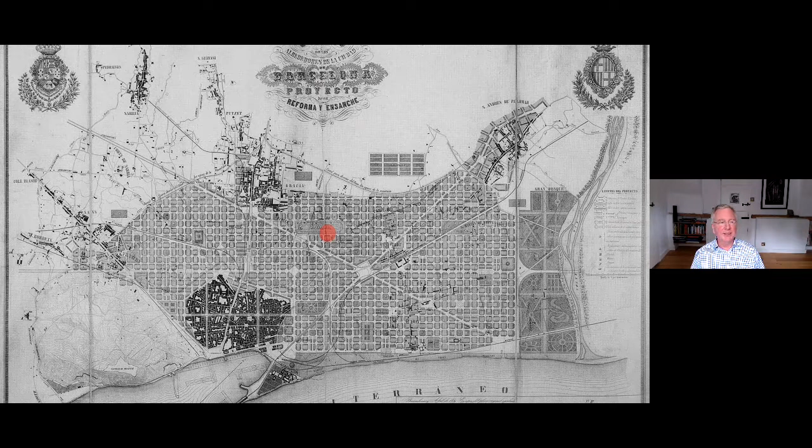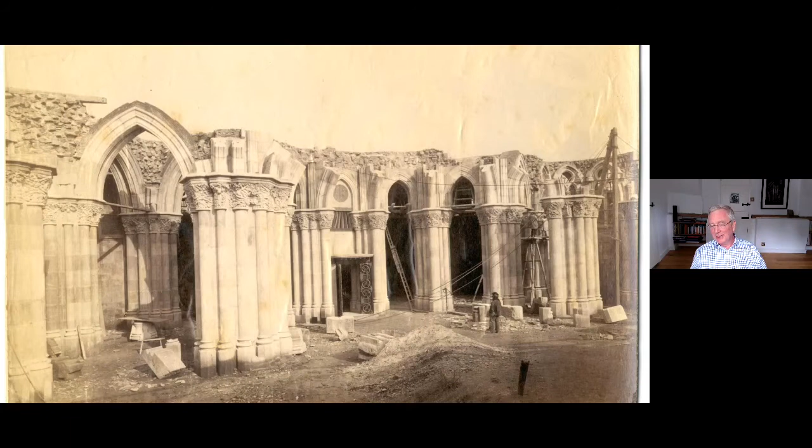That church was well under construction when we get to 1882, when Villar fell out with his client. Not an unheard of thing for architects to have disagreements with their clients, but in this case the disagreement was taken so far that Villar resigned from the project and refused to continue. At this stage, the crypt that you can see in front of you, the basement, was already more or less constructed.

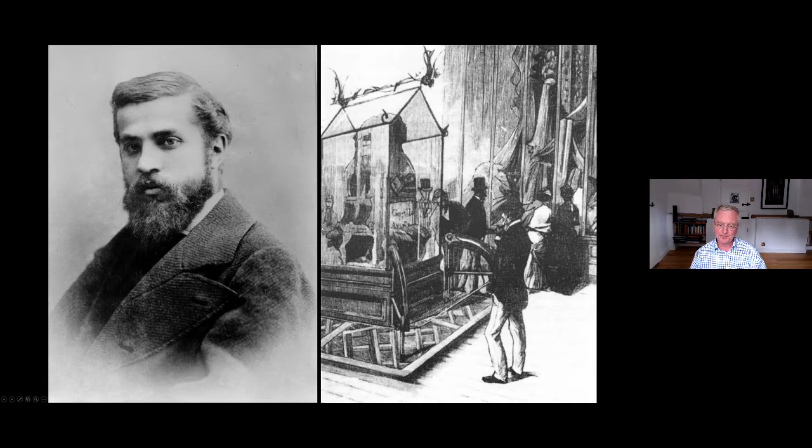What you'll notice from all of these is that at the time of Gaudi's appointment, he was sort of related to the arts and crafts movement of the UK. He was into craftsmanship, organic shapes and forms, and decorative arts, not strictly architectural, although that came later.

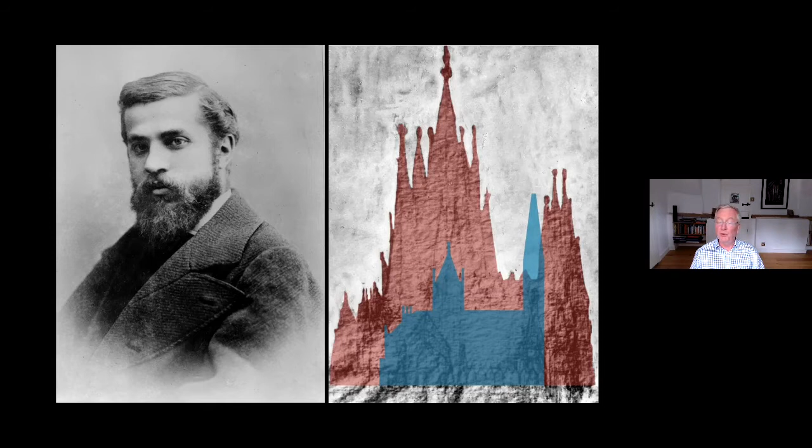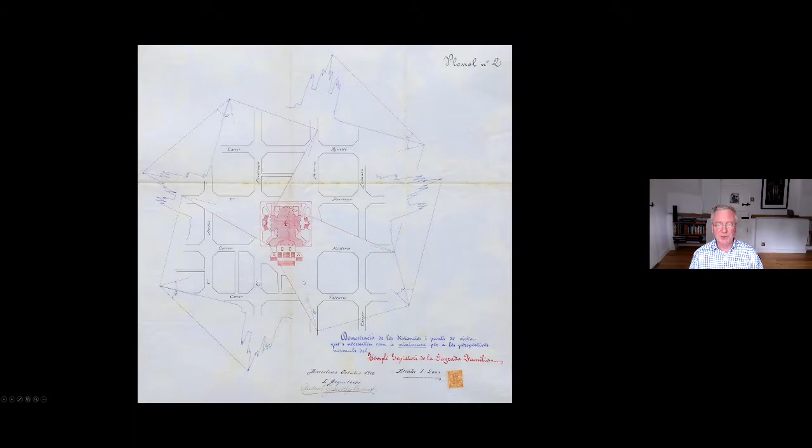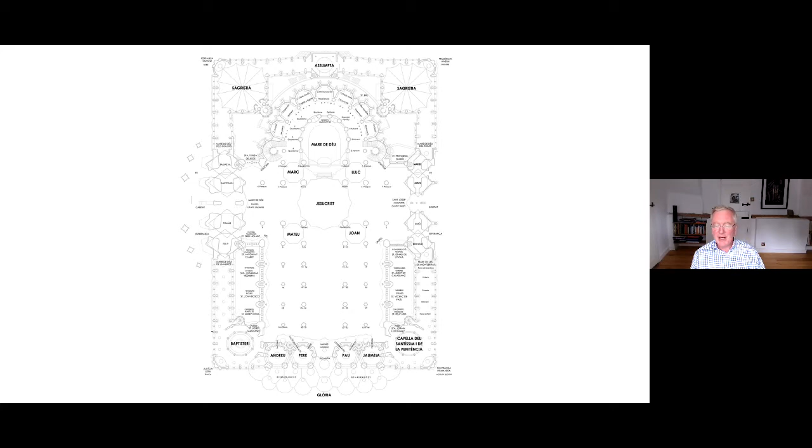But for this project, there's also theology. Every part of the church has theological meaning. This is an early drawing showing the meaning of all the different components. So it's no good me saying we don't need 7 columns in this area, we can make do with 4, if I've forgotten that there are 7 deadly sins and 7 virtuous graces. So we will have 7 columns whether we need it or not. It's another facet of design which I was unfamiliar with, but have now become quite used to.

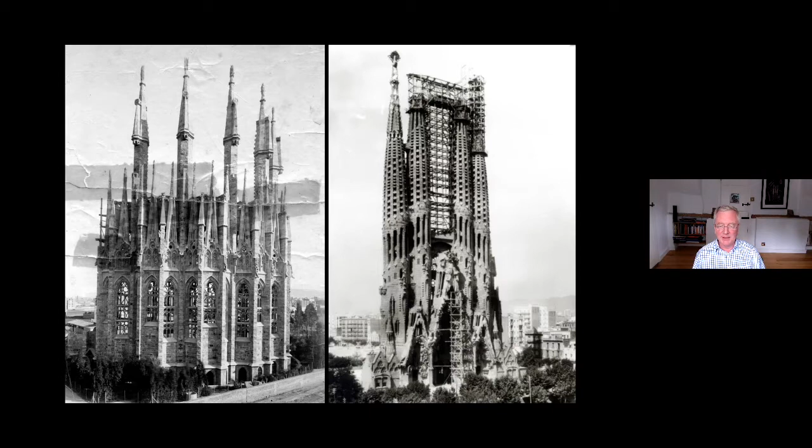Gaudi, after his appointment, spent the first 20 or so years working on multiple projects, but the last 20 years he devoted entirely to Sagrada. This is the state of construction when he died in 1926. You can see on the left he completed the apse around the main north end of the church, and he completed the east entrance, the side door, the nativity facade that you can see on the right.

The nativity facade is in its own right an absolutely incredible work of art. Its theme is life - it's about life coming out of the primordial soup in the background, as well as the classical nativity story in classical sculptures in the foreground.

It's got some Gaudi twists, some humour. Under the left-hand column of the main door is a turtle, because that way lies the sea. But under the right-hand column is a tortoise, because that way lies the land. So every time I go to Sagrada, I can read more and more into what I see and see more details.

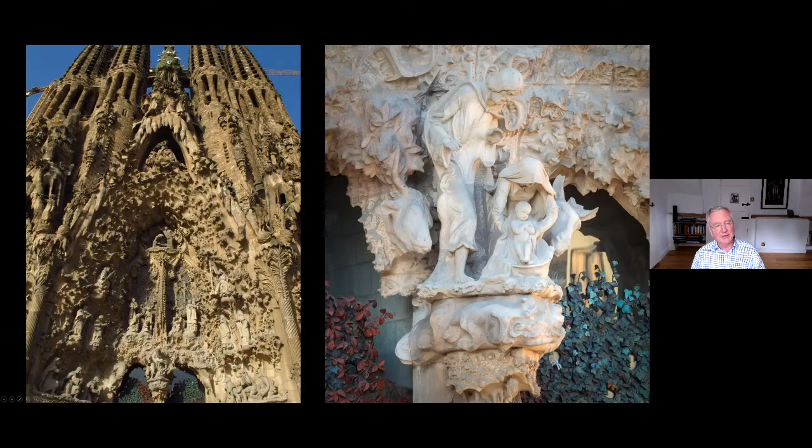You see here more details of the sculpture. On the left, amazing hanging stones done in pure masonry - there's no tension elements holding it up. On the right, the classical sculpture of the Nativity itself, sitting right in the middle of the main doors. And the main doors themselves, these amazing cast bronze doors, were only installed 3 years ago. So even something supposedly finished 100 years ago is still undergoing its finishing touches 100 years later.

Which brings me to another point about Sagrada: it's my observation that this project lifts people in their abilities. It somehow gets under their skin and causes them to do things they might otherwise not have done.

These doors are the work of a wonderful Japanese sculptor called Sotoo. Mr. Sotoo joined the team in 1978 as a stonemason with a hammer and a chisel, and he went on from there to do classical sculpture - some of the musicians you can see on the left are his work.

And he's now in charge of the whole decorative arts program at Sagrada and is personally responsible for these doors.

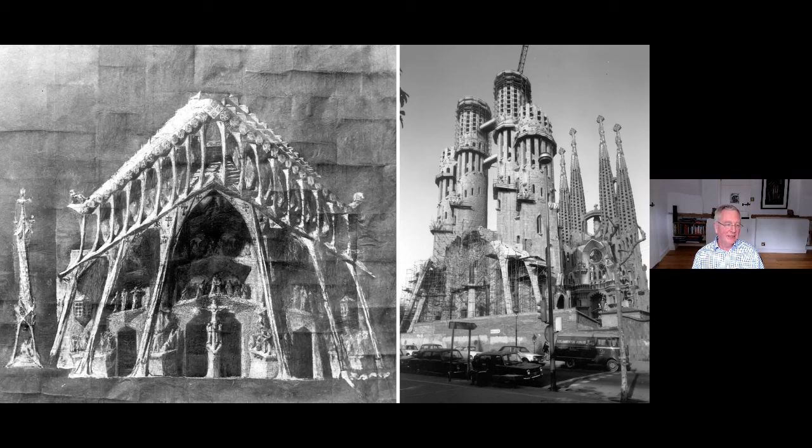On the left you see Gaudi's own drawing. So Gaudi didn't draw in a technical drawing sense - he drew in this more artistic sketch sense, and that's one of his drawings there on the left.

And here you see the completed Passion facade. The cross on top was only put on two years ago, so again it's reached fruition eventually. What you see here, of course, is a completely different artistic style to the one on the other side of the church. Life is carved in an organic fashion, and death is in this cubist, straight, harsh, angular fashion, with sculptures to suit by a guy called Josep Subirachs, again a local sculptor who was unknown on his appointment.

The arts intelligentsia, if you like, of Barcelona objected to his appointment, but he turned out these wonderful creations. You can see here the soldiers in the middle, or riding the horse on the left, that their helmets are actually the chimney pots from Casa Milà, as Subirachs provides a nod to the original designer of the church, Mr. Gaudi.

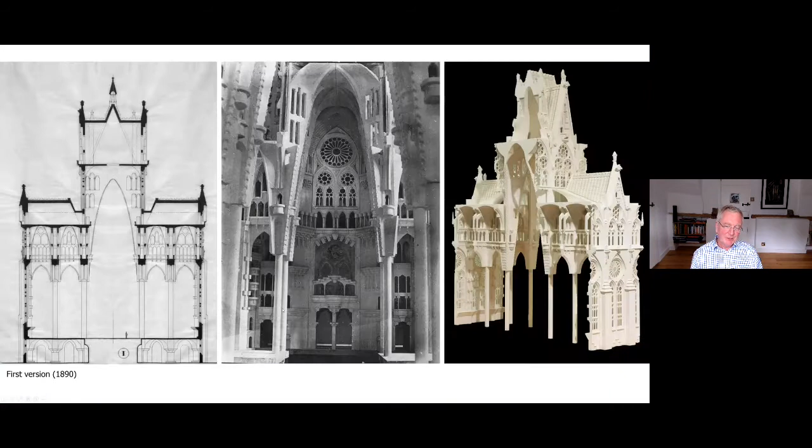So Gaudi started as an arts and crafts architect, a decorative architect, but he changed over his life. His first sketches for Sagrada, you can see here - the first version is again a more neo-Gothic, classically neo-Gothic design. It has modernist elements, stricter geometry than usual, and one particular structural form.

He didn't want to have either buttresses or flying buttresses outside the church - A, because he thought they shouldn't be necessary, and B, because they prevented light coming in through the windows, and he wanted the most airy and light-filled interior possible. You can see in the centre of the left-hand section this idea of a great big catenary arch, an arch which would carry load vertically downwards without creating thrust, sideways loads requiring buttresses on the outside.

And you can see here the back of the Nativity facade, because the Nativity facade was actually constructed in accordance with this first design, so that it is in this neo-Gothic, but slightly angular approach.

His third version is the one in front of you, where he is now trying harder to make the structure actually line up with the forces. You can see on the left the columns in the centre of the diagram aren't vertical - you can see how the load travels down the building, but he's still got where the columns branch. He's put in layers, platforms for the branching, which you can see in the middle and on the right. Actually none of the church is constructed in this design, because he then developed this technique for designing structure of masonry.

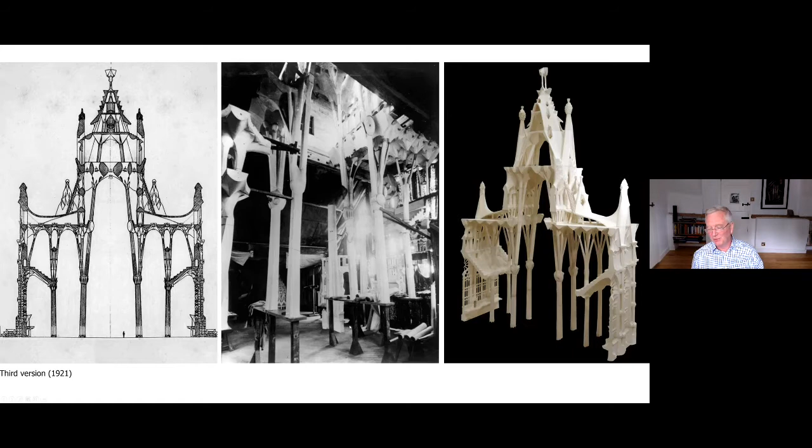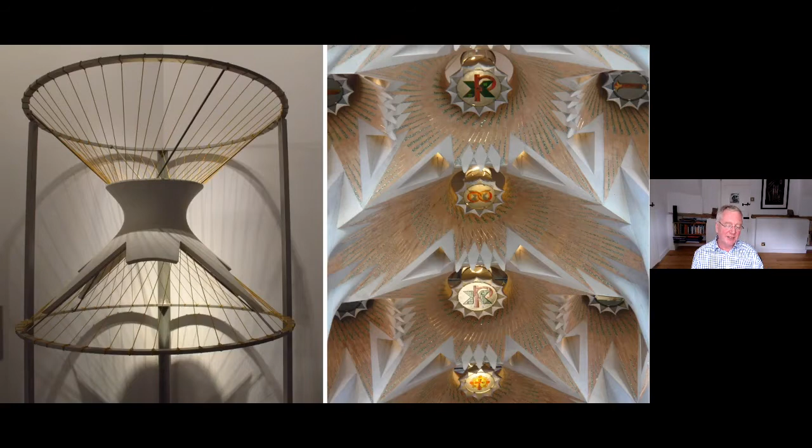Gaudi's second step, apart from making everything structurally perfect, was to become an absolute devotee of geometry. The piece of geometry he chose was what we'd now call a ruled surface—a surface that can be defined by straight lines, at least in one direction.

On the left, you see a model of a hyperboloid, a surface of revolution similar to those used in cooling towers at power stations, for example. His other primary surface was the hyperbolic paraboloid, which is a twisted square.

On the right, you can see the ceiling of the nave is entirely constructed out of hyperboloids. Even the decorative elements, those teeth hanging down between the hyperboloids, are actually the intersection of the straight lines between two adjacent hyperboloids. So the tiling follows the straight lines.

And it's a beautiful surface to use because the straight lines give it a way of order and a way of making it. We'll talk again about that later.

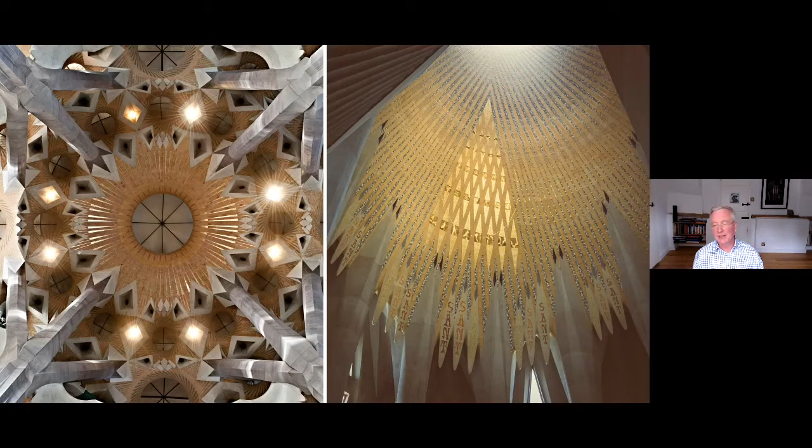Here, two more massive hyperboloids. The left-hand one is underneath the main tower, above the crossing in the middle of the church. The right is the one above the apse, which is also above the crypt. This yellow triangle you see glistening actually represents God, his or herself, being illuminated from above. So the big towers I'll talk about later are actually also lanterns, bringing natural light into the body of the church.

And at the end of the nave will be the main entrance, the Glory facade. So that's the first 130 years. And then we get to...

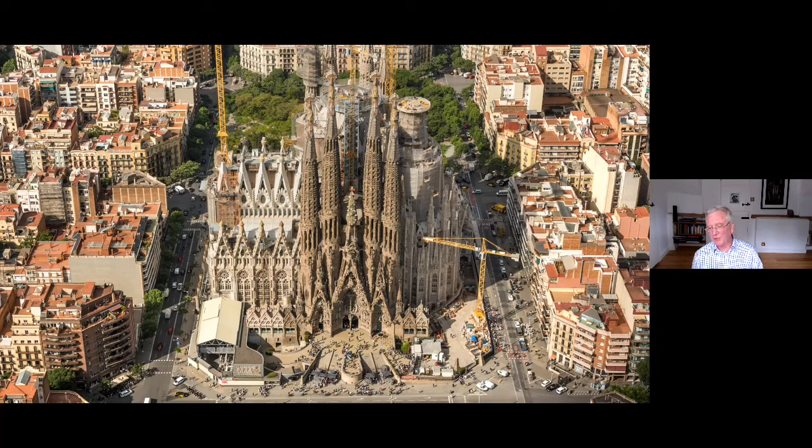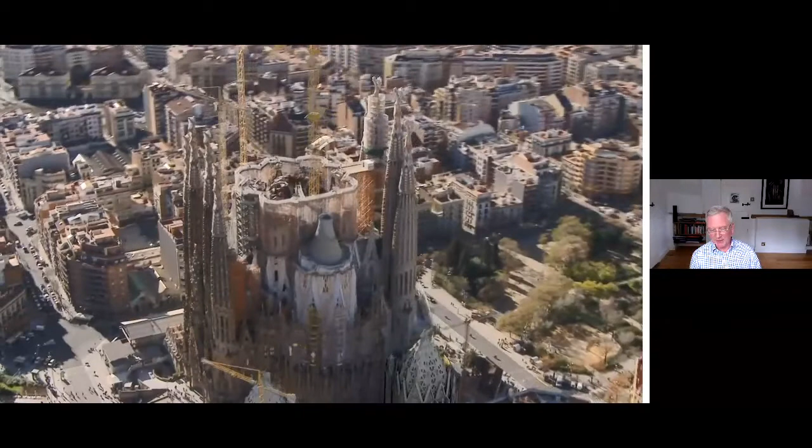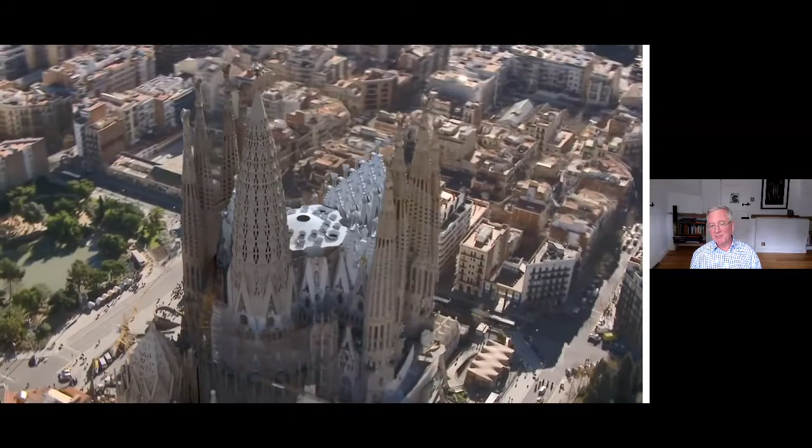And this is the amount of construction still left to be done. In the foreground you can see the two sacristies, one of which has now been completed, but wasn't completed 5 years ago. This is the Mary Tower, the first of the big towers on top, the one that sits above the apse and the crypt. There you can see the main roof, the structure, the room called the crossing underneath the main towers.

Here's the bottom of the evangelist towers, the 4 towers that surround the main towers. This is the pediment of the Passion facade, and I've already shown you that that's complete already. At the front entrance we have the 2 baptistries on either side, and then the main entrance itself with 4 more bell towers and this amazing canopy hanging out over the street. We have the 4 evangelist towers that surround the main Jesus Tower itself.

So when complete, the Jesus Tower, complete with an inhabitable or accessible cross at the top, will be 172.5 meters tall, making Sagrada Família the tallest building in Barcelona, the tallest church in the world, but still 1 meter shorter than Montjuic Hill, because Gaudi thought it wasn't polite to challenge God.

So on the left here, you can see the challenge writ large. We've built the dark brown bit, but we haven't yet built or even designed the pale brown piece, and we want to achieve what you can see on the right, the final construction of this wonderful church. And to do that, we have to speed up the rate of construction by a factor of 10.

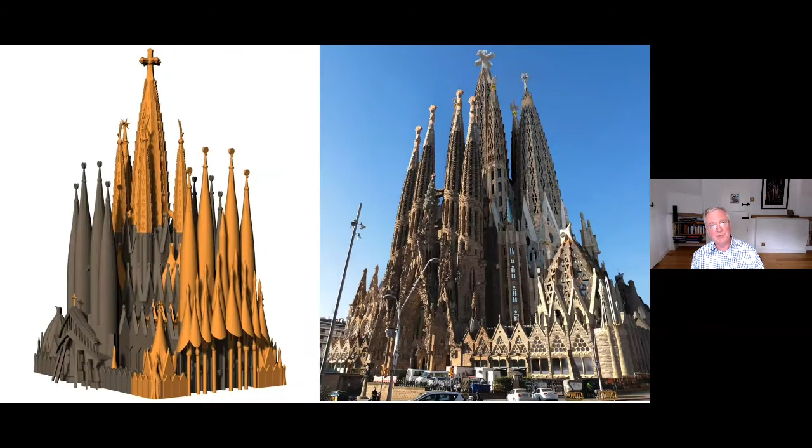The second part of the challenge is a legacy of Villar. The Mary Tower, the first of the big 6 towers, sits vertically above the crypt, and the crypt, when it was designed, had no idea that it had to support anything of this magnitude and weight, and therefore the foundations literally couldn't support it.

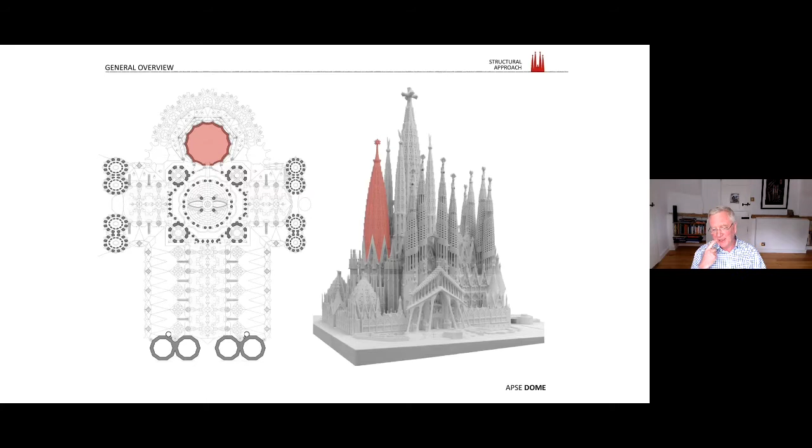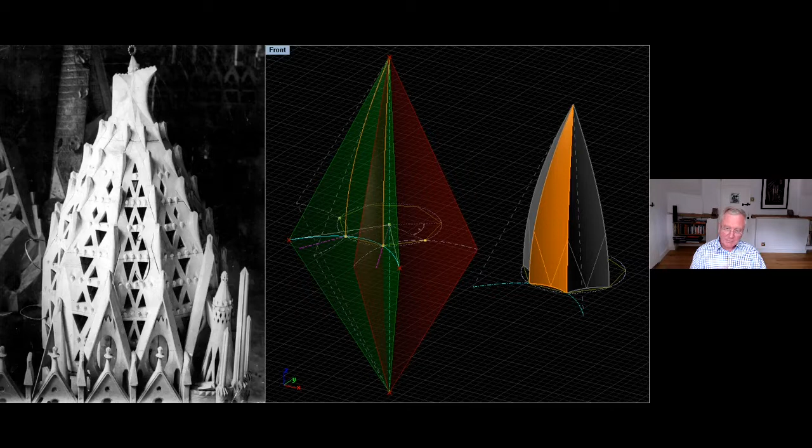We know the geometry of the Mary Tower because one of the models pieced back together again was this model on the left of the sacristy, and the Mary Tower's geometry is similarly made from the intersection of some vertically oriented hyperbolic paraboloids you see on the right here that rotate about the central axis, and where they intersect is what gives you this tower shape.

And now we can do all of that with Rhino and Grasshopper, and then extend it to 14 faces and the height of the Mary Tower, and this is what you get. This is the tower that was fully designed architecturally before the foundation came to approach us to talk about the structure.

But the problem was that you couldn't build this in masonry conventionally and support it on the crypt that was already completed, which you can just see in the bottom left of the section on the left hand side of the diagram.

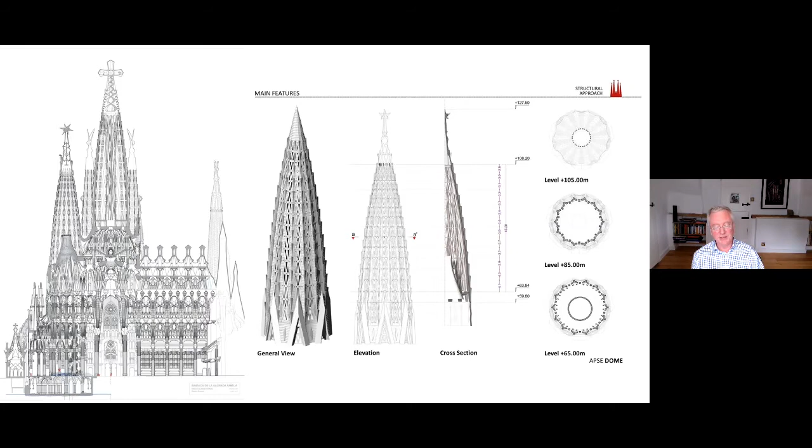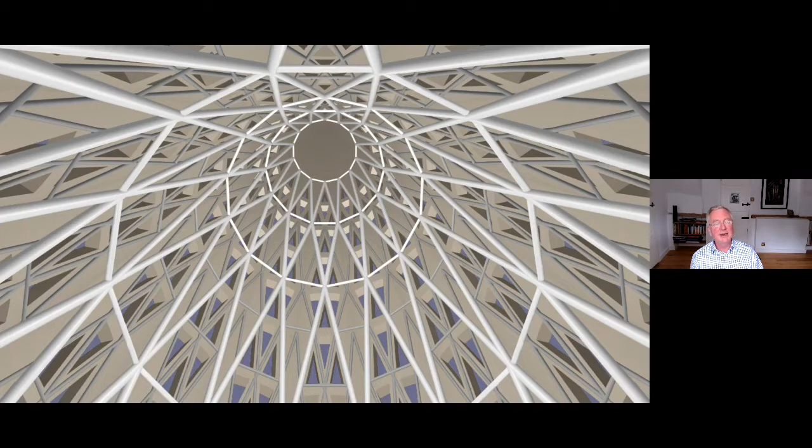The solution being proposed by the client at that time was to build a steel frame and then clad it with lightweight cladding panels that looked like stone. So from the outside, you could be fooled into thinking you were looking at a masonry tower, but inside it would be a bit like going around the back of a Hollywood Western set, and you'd see the scaffolding or pipework arrangement to hold it up.

The third part of the challenge, which we took very seriously, is how do you maintain the quality of this amazing project? This project's been already under construction for 130 years. There are a lot of people who think it shouldn't be completed at all because nobody can match Gaudi's talent. And there are others who feel it should remain as a building site because that's more interesting than a completed church. But of course, for the client, they want to complete a church, but to the highest possible quality.

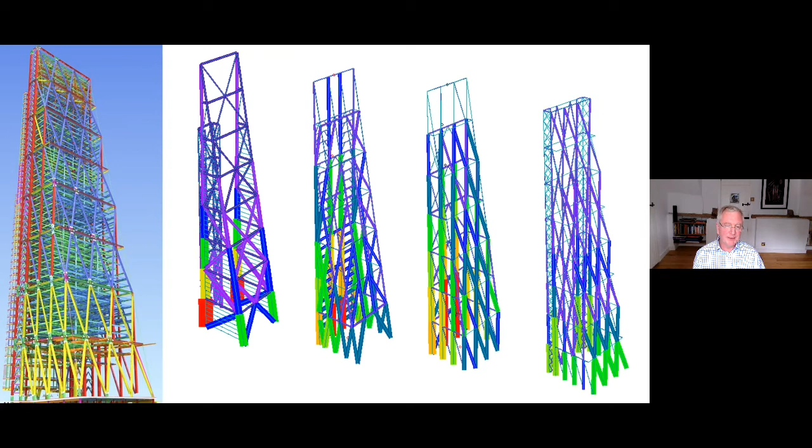So the first thing that we did is to say, well, what else do we know? What do we know that would help us meet this challenge? And the first thing we said is we knew quite a lot actually about steelwork. We just completed the Cheese Grater, or Leadenhall building, in London with Richard Rogers. We'd also completed the Orbit out at Olympic Park with Anish Kapoor. These are examples of complex steelwork.

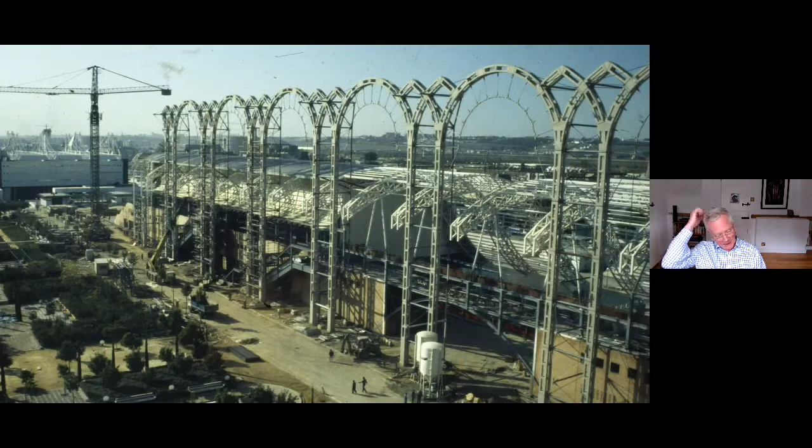But back in the 90s, we had made this slightly strange stone facade for a pavilion at the Seville Expo. This was a project I'd worked on with the late Peter Rice. And here we were trying to see how little stone you actually need. Stone in a medieval cathedral is using about 2% of its capacity. So what happens if we start using, let's say, 10% of its capacity and use steel to keep it stable? Because that's what the bulk of the stone in a cathedral is doing, is stabilizing it against thrusts and tensions.

We'd done this church with Renzo Piano in San Giovanni Rotondo, Padre Pio, where there's also load-bearing stone, in this case internally post-tensioned using steel strand. And in Sydney, where I've spent a lot of my life, I'd done this sculpture in sandstone blocks using stainless steel rods, also post-tensioned to hold the blocks together, which is how you can get this arching action. So we began to think, is there a way of actually building it in stone, but within the weight limit of the crypt?

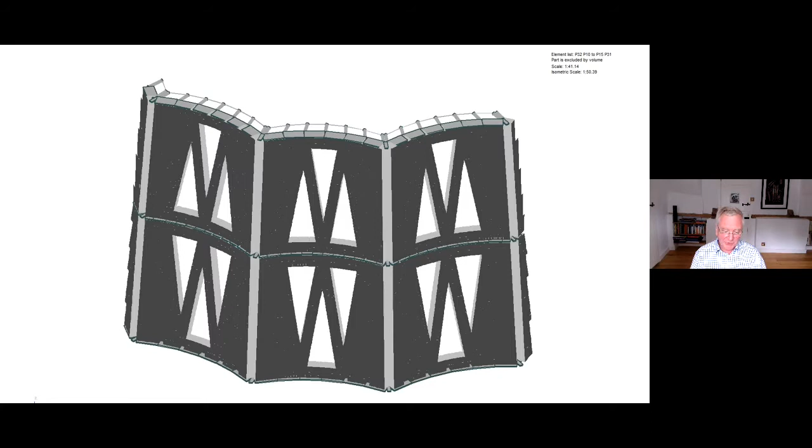My way of working is to use a computer to try and work this out. My head is not big enough to work out how structures in three-dimensional shapes and forms really work. So I built a finite element model in a structural analysis program. This is just 6 panels out of the whole model of 14 stories and 14 panels per story. And what I found out was that as a stone panel of only 300 millimeters thickness, we didn't have a structure.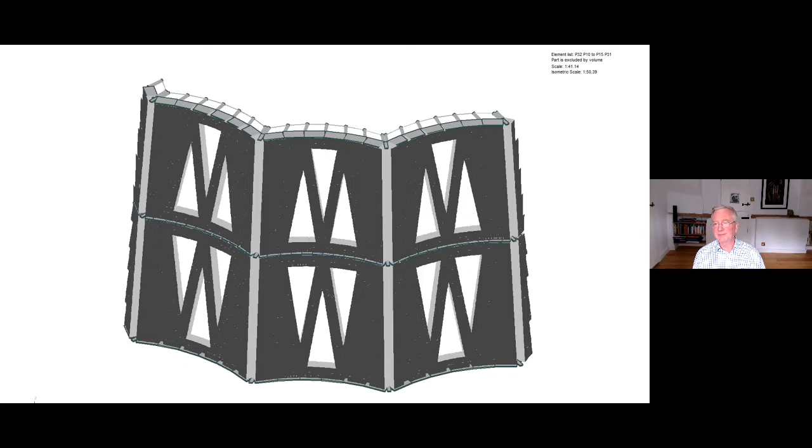You see, if the wind blows, this is what happens. The green is compression that the stone is quite happily taking, and the red, though, is tension that the stone is unable to take because it just pulls the joints apart. So this is the worst case panels under the worst load conditions, but you can see we just don't have enough weight to hold the tower down against the forces of nature trying to push it sideways.

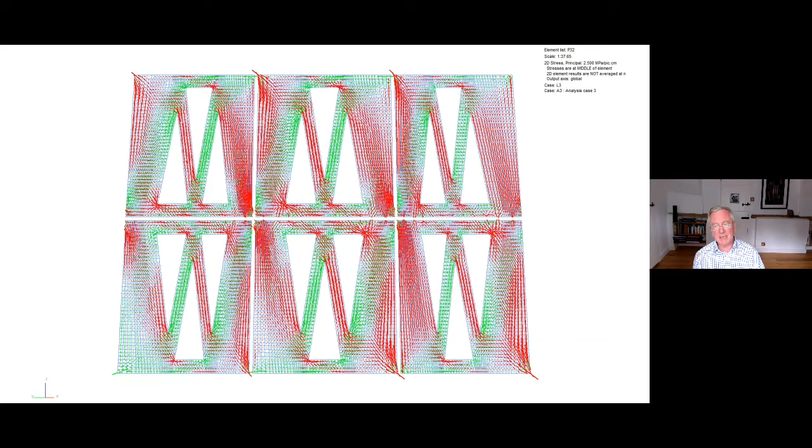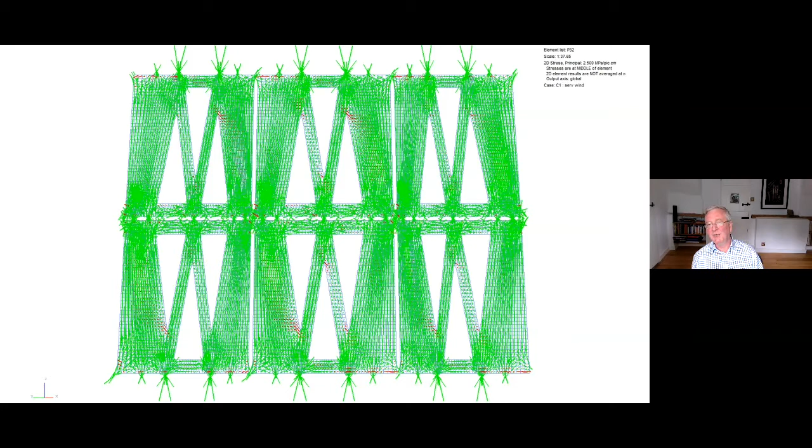But if we insert steel rods into these stone panels and post-tension them together, we pre-compress all the stone. So this is the compression field that you can generate with a few strategically placed rods. And now when the wind blows, you don't get that net tension because it doesn't really overcome the compression. There are a few little areas of tension, but they're not anything that will cause anything to break. Just locally we'll get joints opening up by a fraction of a millimeter and then closing again when the wind passes.

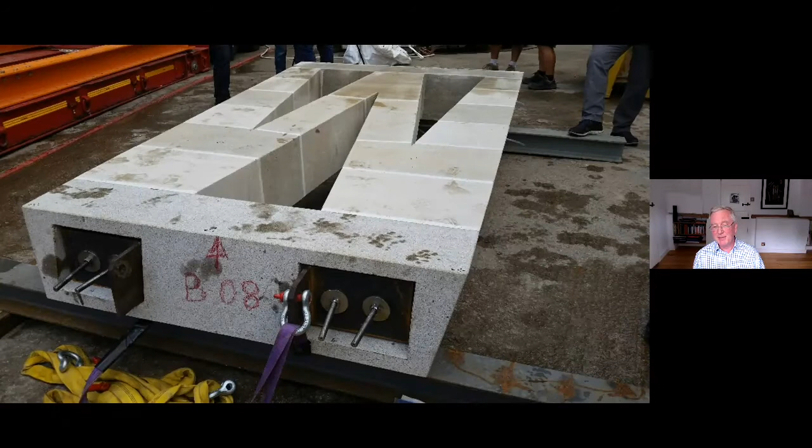So we took this to the client and the architect and said, what about it? This to us looks like a good strategy. And the amazing thing about Sagrada is they are also the builder. The builder was very keen to try out this new strategy. He wanted to know how easy was it to build? Did he like it? Did it save time? Was it easy to do? And so within a month, they had made a panel. They had cut a set of stones. You can see here the 20mm rods holding it all together.

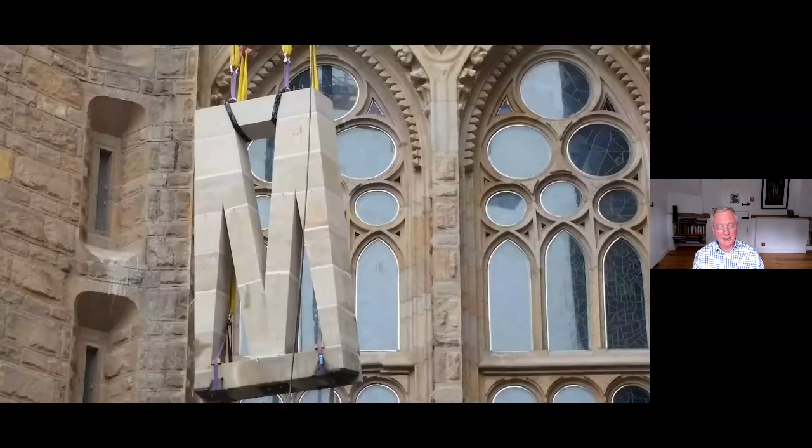You can see here it being lifted up to make sure it works in all different directions. And I love the fact that it's being lifted up vertically above the place where Gaudi himself did all his experiments. There's a bit of a hollow below you in the ground where he could do experiments out of sight of the passing public.

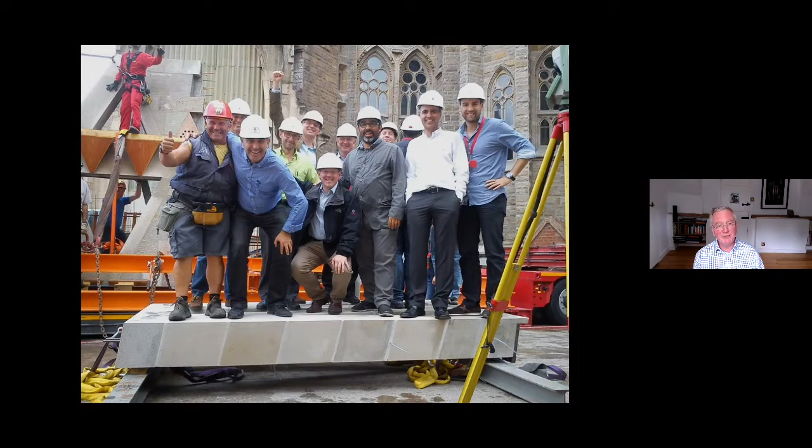Here you see the happy team. The builder is second from the left, and he's overjoyed at this experiment. He said it took him a day to put it together, and if you were doing anything similar to make a lightweight panel, he thought it might take a week.

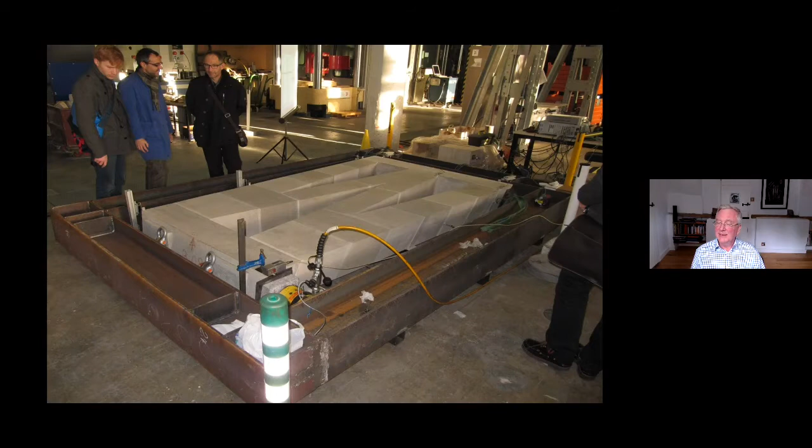An advantage for us as engineers is we can now test it. We know the computer says it works, but was the computer right? Is the computer modeling reality accurately enough? Have we made the right assumptions? What you see here is this big jack in the foreground pushing it sideways in the same way as the tower will when the wind blows. We test it out to make sure it behaves the way we're expecting it to behave, and I'm glad to say it did.

So a little intermission here, which is to say that projects are all about teamwork, and to get teamwork you have to have communication. I've never worked on a project with richer communication, and I think it might be because we don't speak Catalan, and our Catalan colleagues can speak English, but it's a bit of a struggle. So we communicate more by drawing than by talking.

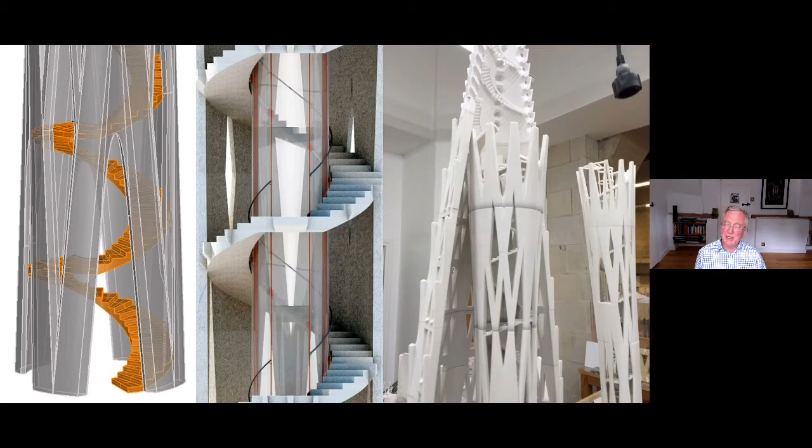You do lots of computer modeling. On the left you can see a sort of skeletal model, in the middle a rendered model, and on the right, from the same models, you can produce rapid prototype physical models at scale. Every time we go to Barcelona, which before the pandemic was once a month, there'll be a new set of models for whatever it was we were considering designing.

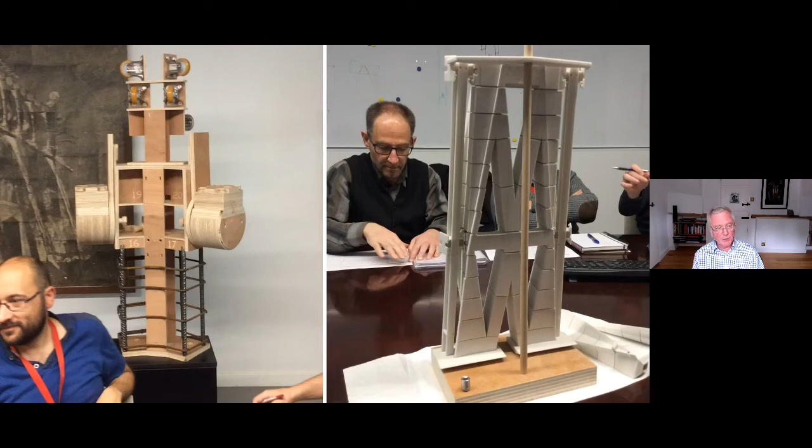And these are models of our own, showing construction stages of the towers, how you build it one by one. And here are two more models. The left-hand one is a model made by the builder, a one-to-one scale model of one of the connections, where he's finding out how easy is it to get the bolts in - is this a sensible way of making this connection?

And on the right is a model made by the architect, a little bit tongue-in-cheek I hope, because they've made a model where all the stone blocks are individual rapid prototype pieces, and then they've threaded a little rod through the middle, and you can see the spanner in the foreground for doing it up. I think they were just checking that this structural idea of post-tension panels actually worked, to get a feel for it.

And then lastly, this is a sketch by our project director, Steve McKechnie, showing he's developed a way of sketching which is idiosyncratic. It's purely Steve on an iPad, and it's a cartoon. But the wonderful thing on an iPad is you can zoom in and out, rub out things you don't like, correct them a bit. It's not perfect, but it absolutely conveys all the information he's trying to convey.

I think the point I'm trying to make here is some of my generation will say you have to be able to sketch with a felt pen to design. My view is that is not true. You have to be able to communicate to design, but it doesn't matter how you communicate, as long as you can communicate clearly and get your message across. And actually having a variety of communication methods is even better than a singular one.

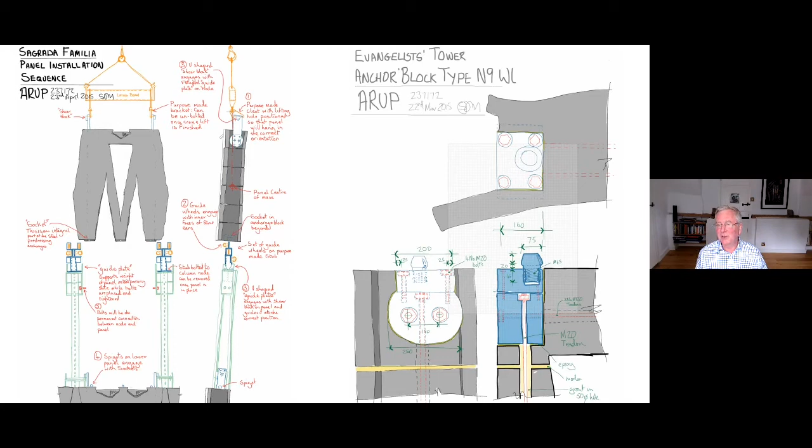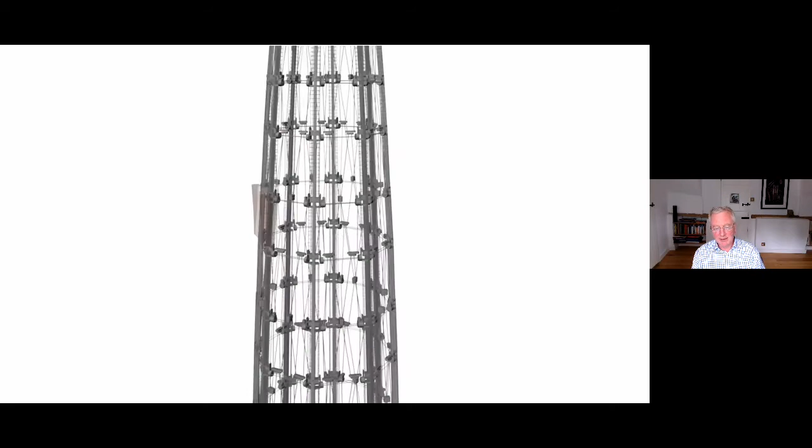So we've now got to the point that we know what we're trying to do, and how do we then build it, which of course we're thinking about all the time, but this is sort of the conclusion of that. The first point is that by using modern BIM technology, we can absolutely define what we want to the nearest millimeter, every fraction of a millimeter. Every component is absolutely represented in the model - every nut, every bolt, every weld, every component of the stonework.

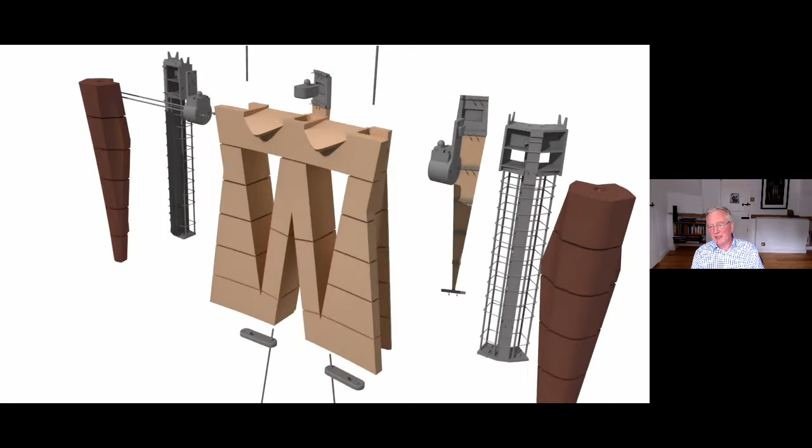This is a complete change in my lifetime. When I started, our construction drawings were representations of reality that took a good deal of interpretation to actually build. But now, we can specify the whole thing.

So how do you then make it? Well, you start with these big blocks of stone. The stone is now coming from all over the world. It used to only come from Montjuic Hill, but the Montjuic quarry closed down in the 70s, so stone now is sourced from all over the place instead.

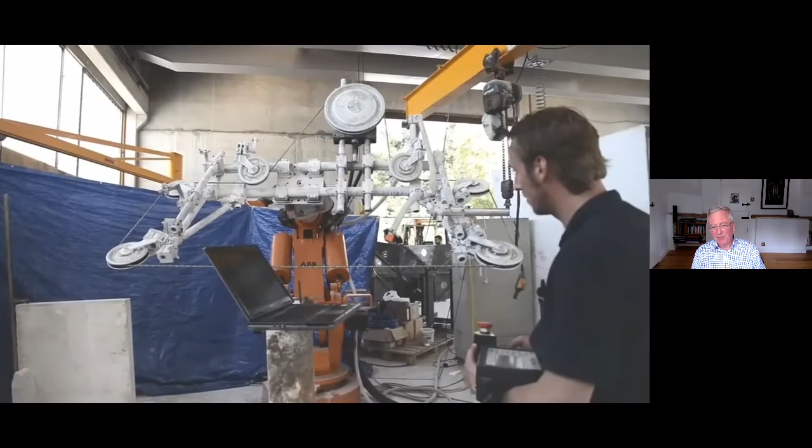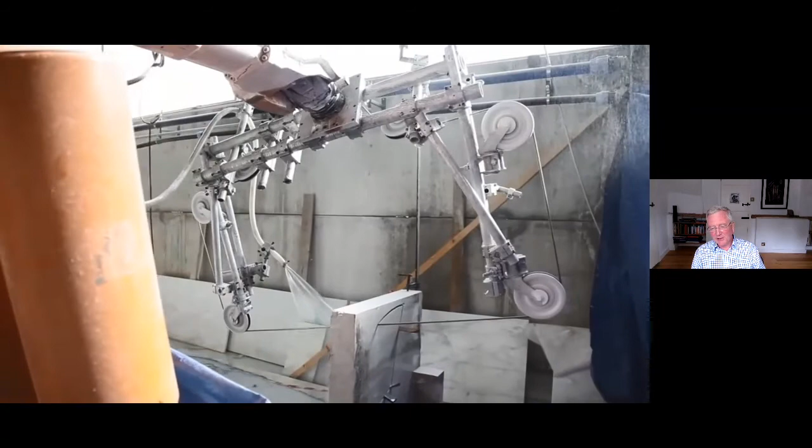And then we get this diamond tip wire saw, which is controlled by a computer directly from the models I've just been showing you, the BIM models. Ironically, it can cut stone to any shape you want, provided it's a ruled surface, because the wire saw itself is a straight line. You can orient that straight line any way you want in space, but it can still only cut a ruled surface.

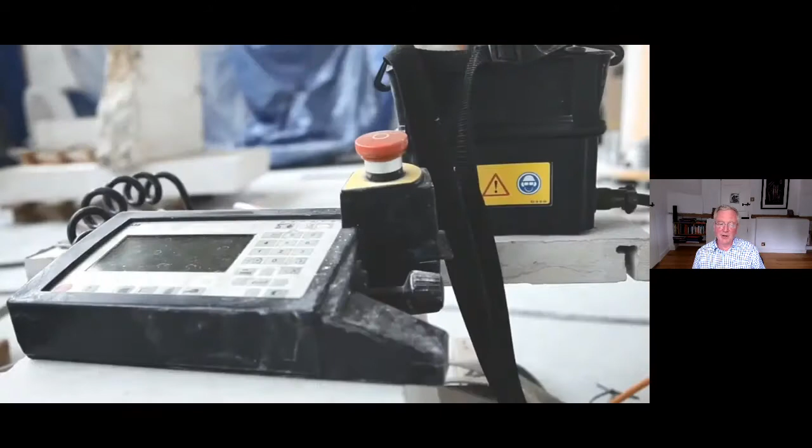So I think it's wonderful that today's technology is absolutely perfect for Gaudi's geometry. I would say this isn't actually a Sagrada bandsaw—this is an example of one in a Carrara marble factory in Italy, but the principle is exactly the same.

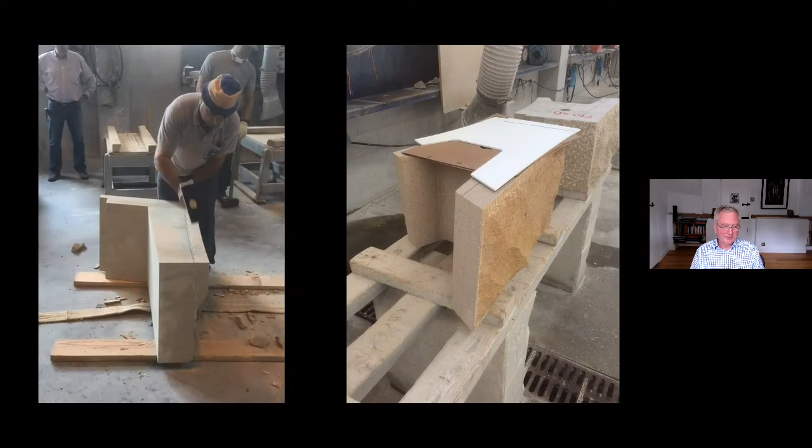And when we've cut our stone to the nearest millimetre, we then hand finish it like this. So we combine our really latest up-to-date technology with craftsmanship that hasn't changed for 1,000 years.

And that gives you these stones you see on the right, where the front face is hand split in the way it always would have been, not just for the life of this project, but I'd say all medieval or Gothic cathedrals. I also like the fact that on the top you can see a cardboard template, which is still used to check the final product, even though it's been cut by a computer.

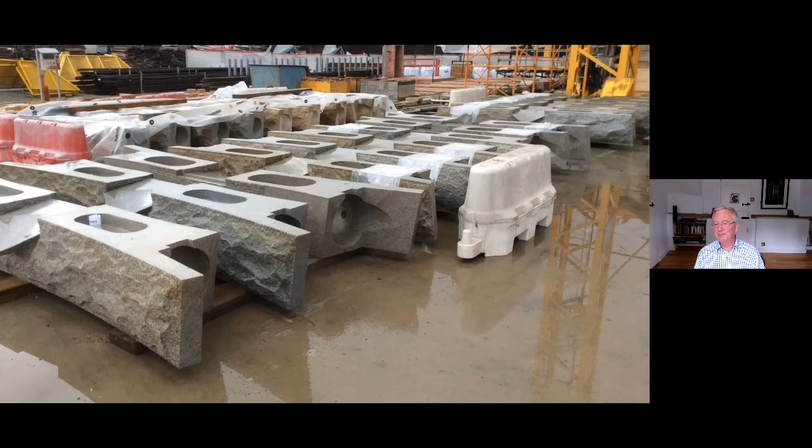So using these techniques, we go into a sort of mass production. These are the most complicated stones on the project—they are the lintel pieces that sit at the top of each panel.

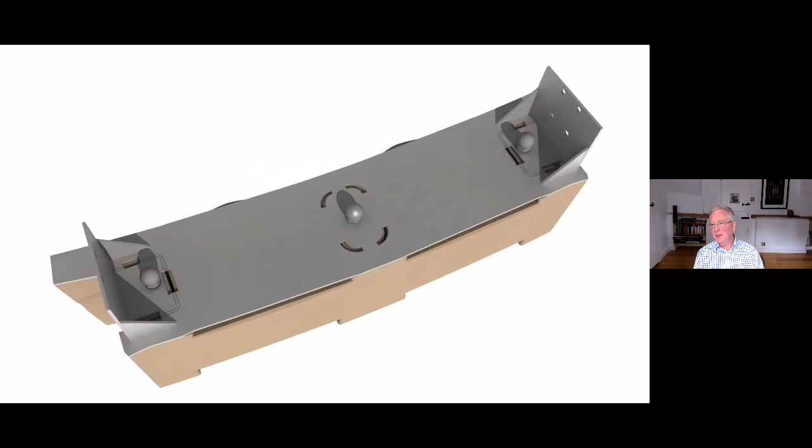This is a laser cut plywood template that goes on top to locate the anchor blocks exactly within the stonework before they are then glued into place with epoxy glue, which is what you see being applied here. So there's a filler piece and then injection in behind that.

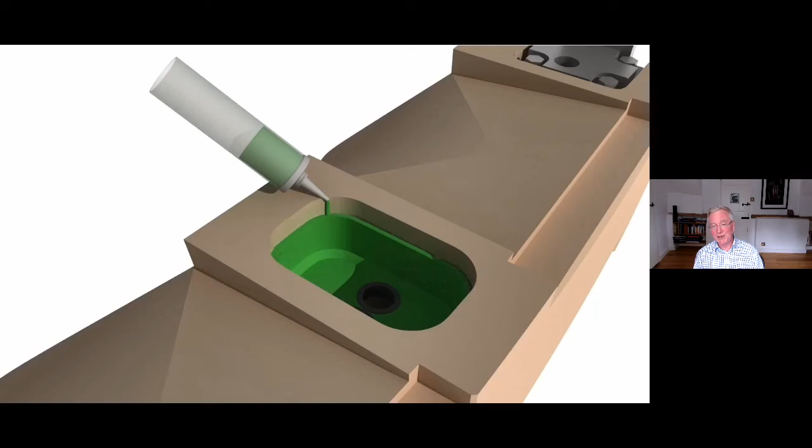You then get the gluing in of each of the other blocks. This video is absolutely meticulous in covering every step of the construction. It has to be then cooked for 8 hours at 22 degrees and 24 hours at 40 degrees to cure the epoxy properly. Then we can take the templates off.

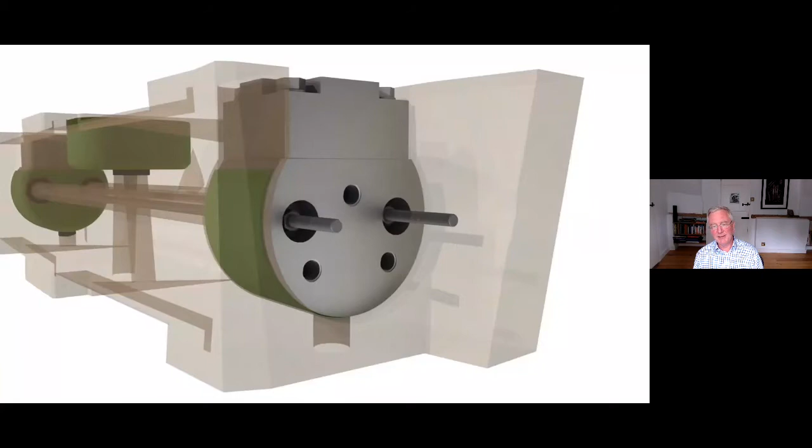We can put in the actual rods that are going to do the post tensioning. We put their nuts on initially loosely. Then we come along with a jack, hydraulic jack, which is mounted on a stool. In that comes, it's done up.

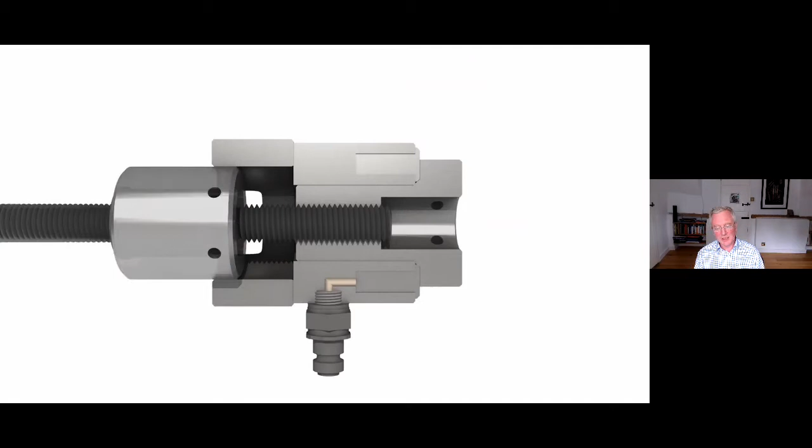We connect the hydraulic hoses. Here we go—pump the jack, stretch the rod, do up the retaining nut, release the hydraulic pressure, take off the jack, and cut off the extra bit of bar that we don't need anymore.

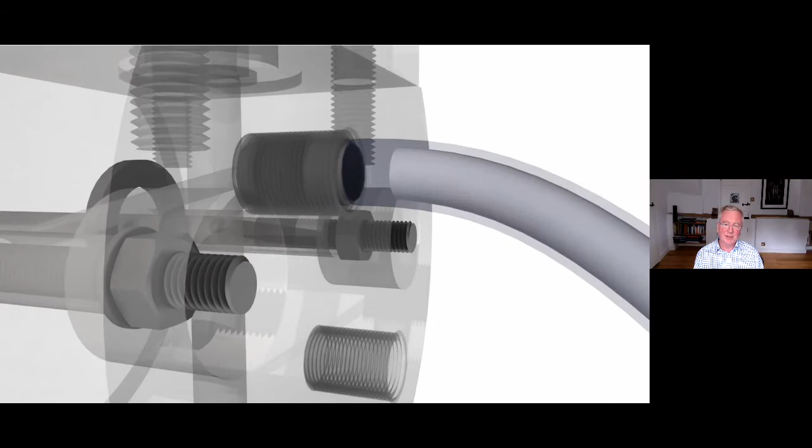Then we inject the cavity around the rod with cementitious material just to fill the void. The rod is actually made of a duplex stainless steel, which should last indefinitely—it's pretty impervious to corrosion. But just in case, we also fill the void with a cementitious material. And that's how you make a lintel.

And here you can see in practice a very short video showing exactly those steps then happening in reality and in the physical world. So everything's worked out in the virtual world and then it's performed in the physical world.

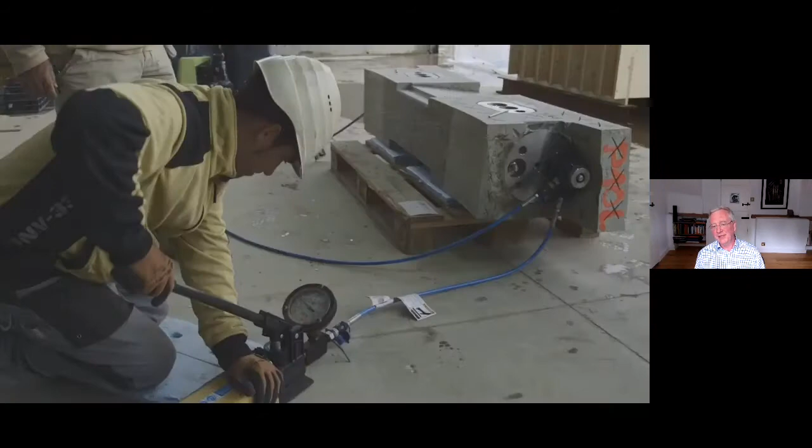One advantage of all of this is not only do you think through the whole process before you begin, but you can also expand your construction team, because this is effectively a training video. It shows everybody who joins the project what they have to do.

And so here you get the resulting lintels, complete with their post-tension steel and the anchor blocks ready to take the vertical bars.

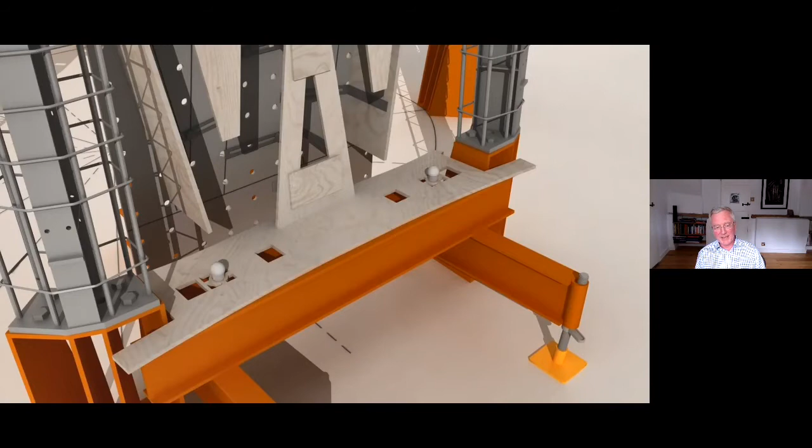And here's a video of the assembly of a panel itself. That template at the bottom is the same template used for the top of the panel below, and this is the way we make sure that each panel fits precisely one above the other.

And then along comes the world's best bricklayer, and you mortar up the joint and you put on the next piece of stone, and so on and so forth until you get to the top of the panel.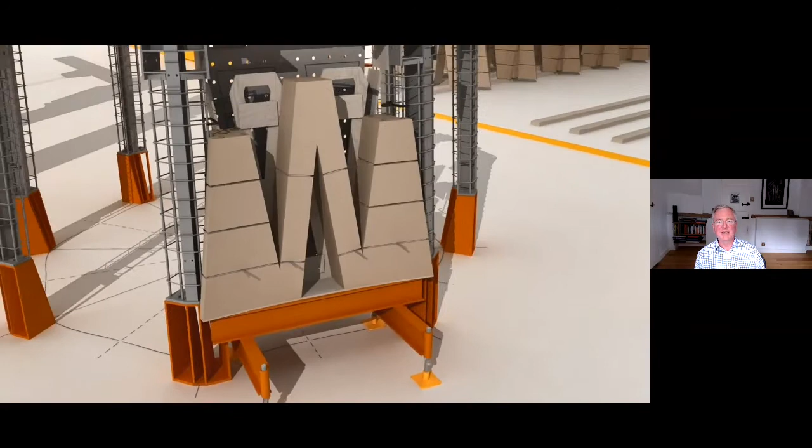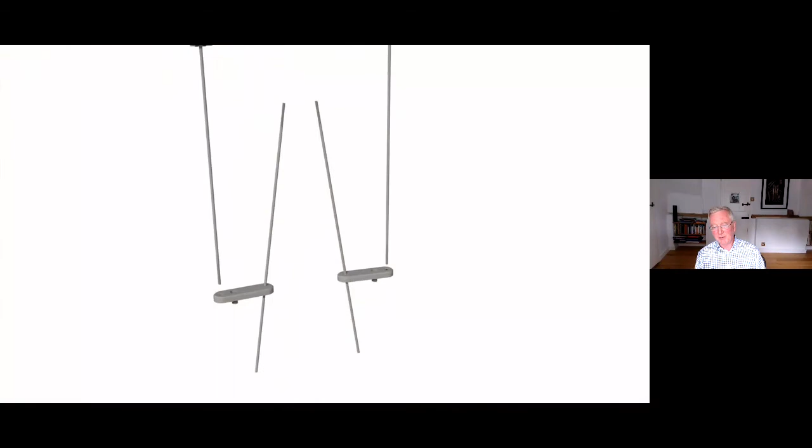And then we start inserting the rods. Some of them have to go in from the bottom, so they're dropped in first. Then on goes the lintel itself, this is the one we just saw being pre-made, the block across the top. Then we insert 2 more rods, we tighten them up, and we post tension them with jacks, just like the ones you saw before.

So in reality, what's that look like? Well, it looks a bit like this. So this is the stainless steel components arriving for one panel, and these are all being made off-site.

So part of what we're doing here is moving the stonemason's yard, the timber yard, the concrete batching plant, all to an off-site location where we prefabricate large components that are then going to be site assembled. So this is the prefabrication, and you get everything you need for one panel in a box, just like IKEA on a slightly larger scale.

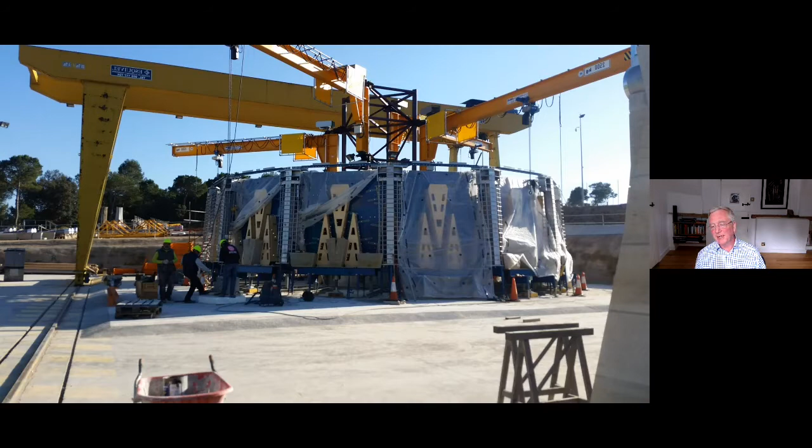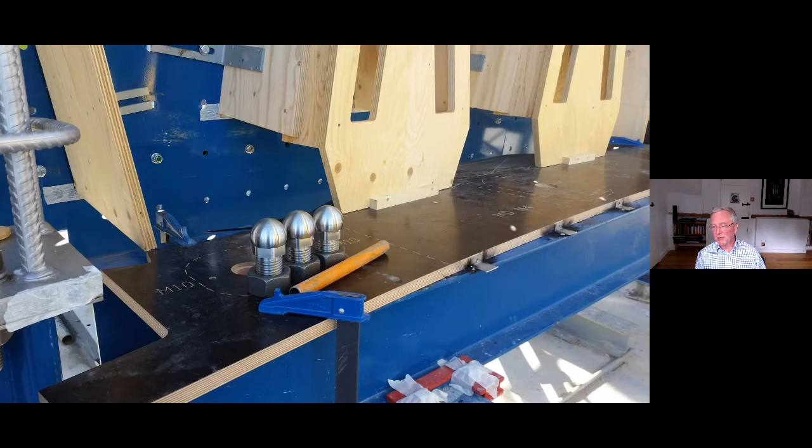Here's the jig that's made up so we can make 14 panels, one whole row of the Mary Tower, at once. Here you can see these are the little stainless steel shear keys that fit through the plywood template and locate one panel above another.

In the background, you see another template being used to make the window, to make sure that the window will fit into the rebates in the stone.

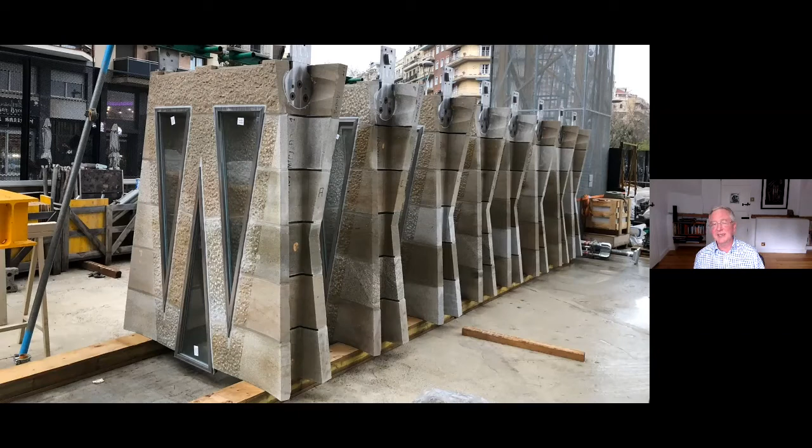And here you see the successful manufacture of one row, in this case, Evangelist Tower panels, pre-glazed, off-site, and then brought to site on the back of a lorry.

And this was the magic moment when they put the first panel on the Mary Tower. The construction program allowed 1 hour to put in one panel, and I thought the first panel would probably take about 4 hours because they'd not done one before. I was so pleased when they did this one in 38 minutes. The very first panel only took 38 minutes to assemble.

You can see on the right those shear keys, the little balls that fit into the holes in the panel above, and when I say fit, they fit with a 1 millimeter tolerance. Our theory is that if we can make everything accurately and put it together accurately on site, we never have to adjust anything or measure anything on site. We just have to keep assembling, just like building something from Lego. You just trust it to be accurate and to fit together.

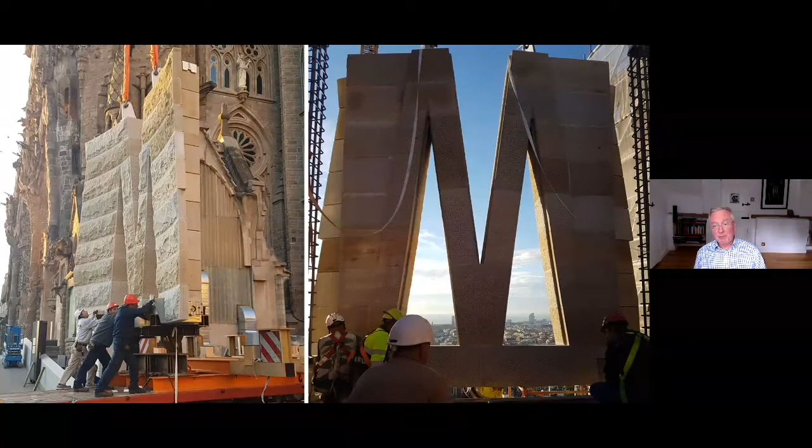Here you see a couple of the big panels. This is now the Jesus Tower, the big tower, because having developed a technique and an approach for the Mary Tower, which is essential because of its weight limit, the decision was taken to use that on all 6 towers because it was a good strategy, it was a good process, it worked.

So these panels are now 25 tons each. They come to site in the early hours of the morning because you have to have road closures to let the big trucks through, and they get lifted up. I'm very grateful to Time magazine for producing this video for us of one of the big 25-ton panels being lifted up. It's a pity in a way that this happens in the early hours of the morning.

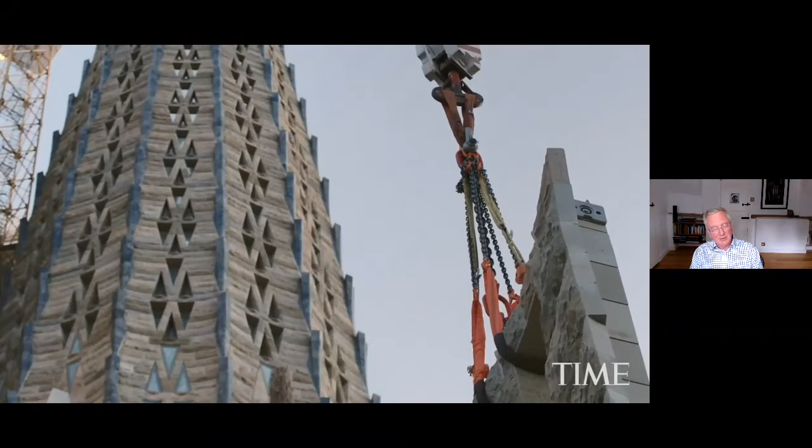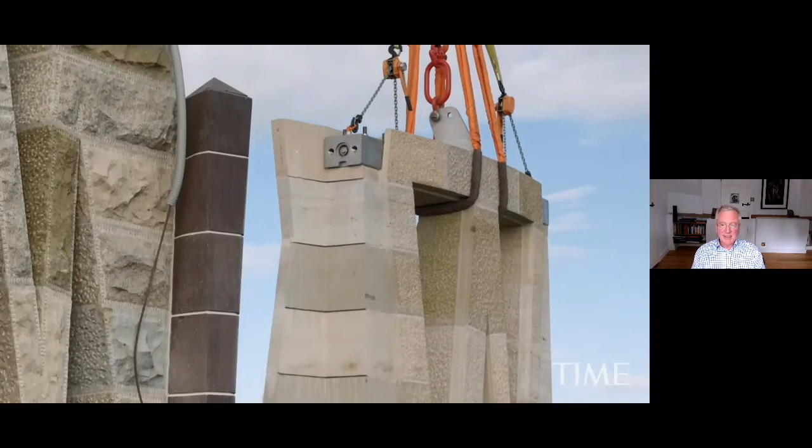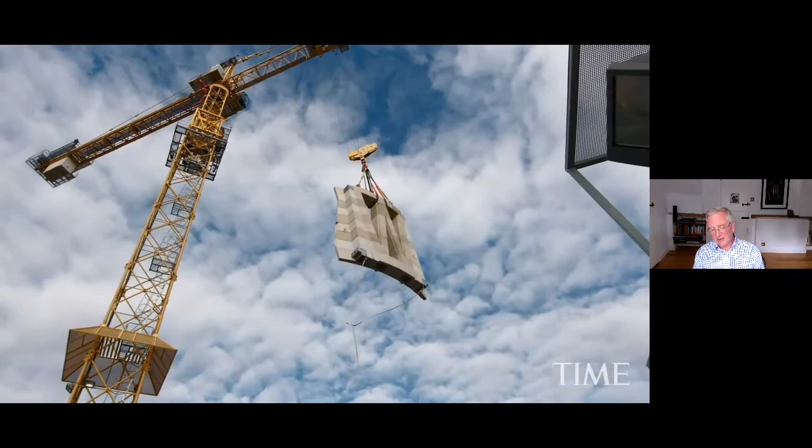Because at this point we have changed construction from a noisy, polluting, messy process with a lot of on-site adjustment and labour to a precision assembly process which is relatively quiet and non-polluting, with not that many people required on-site. And it actually goes further than that. My theory is that this can actually be made into a performance or a piece of theatre, and it's something that people will be attracted to rather than shunning. This will change, I think, the whole nature of construction and development in the future, where construction is no longer seen as an evil necessity, but actually something that people enjoy watching and seeing progress.

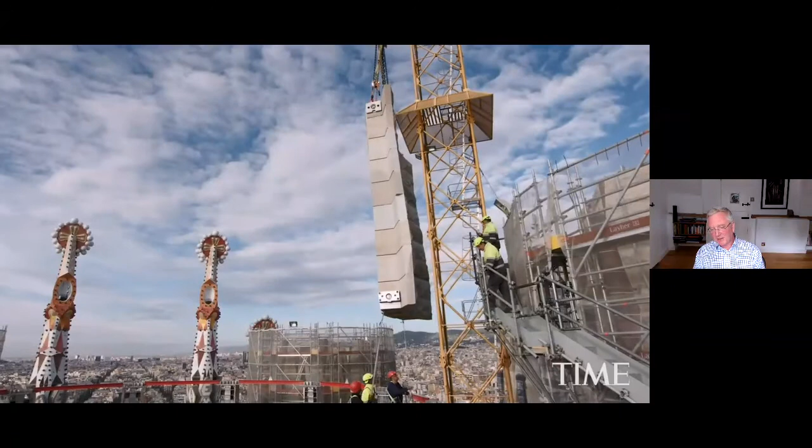So this is a 25-ton panel, and even these big panels go in less than an hour from beginning to end. And here you see progress on the Mary Tower to the point where now a row of 14 panels can be put in 6 hours.

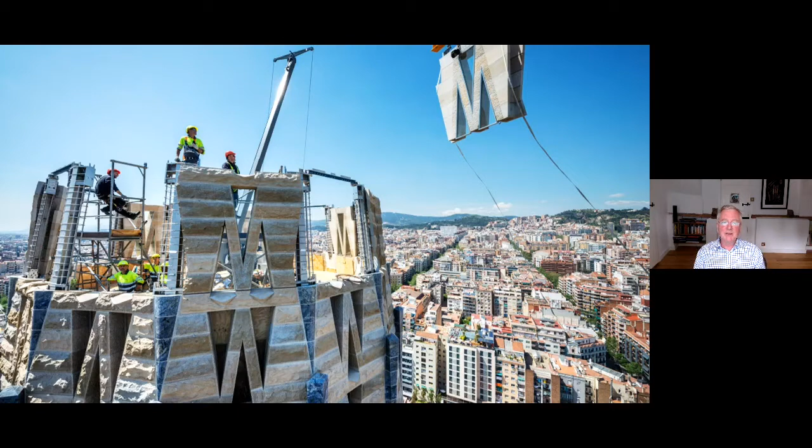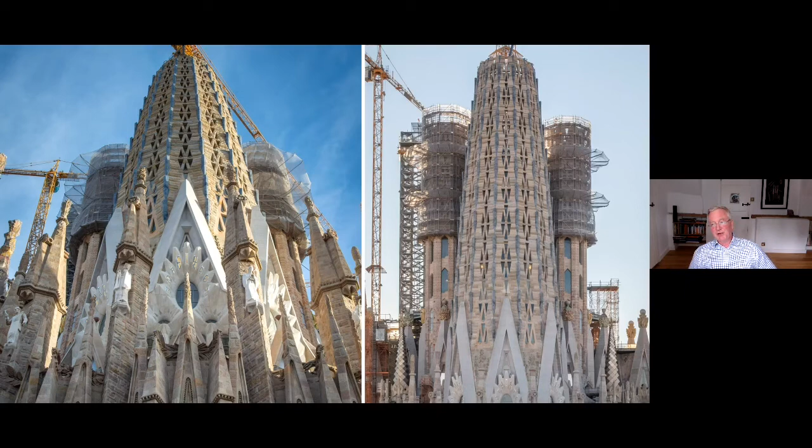There's no scaffolding required to support the panels. There's some scaffolding required to get access to them, to bolt them up, but they just lift them in and put them down. Here you see the progress on the Mary Tower on the left and the right. It's now slightly taller than the bell towers on the Nativity.

So to finish with, I'll just say this is the project that I've enjoyed more than any other in my career. I can't believe my luck. I don't understand how I managed to get involved with it, but it's given me more pleasure, I think, than any other project in my life, because it's not just what you can leave behind. It's the approach you take.

Some people say, well, that's all very well for Sagrada, but what relevance is that to my relatively ordinary project? But actually, I think using technology, using natural low carbon materials, using craftsmanship and love to put more emotional content into what you're doing, and to produce something that hopefully will last a very long time, which suits the circular economy - these are all principles that you can apply to any project, not just Sagrada. So with that, thank you very much.